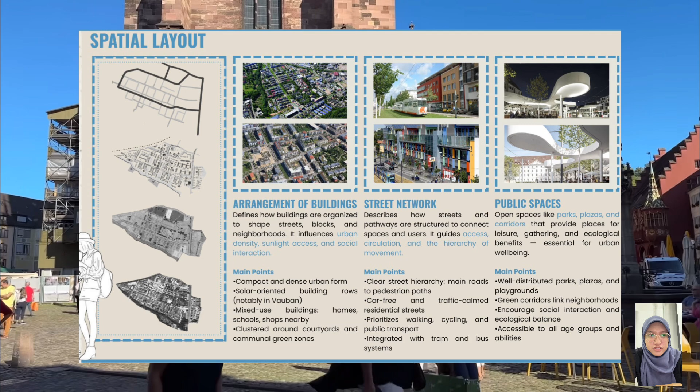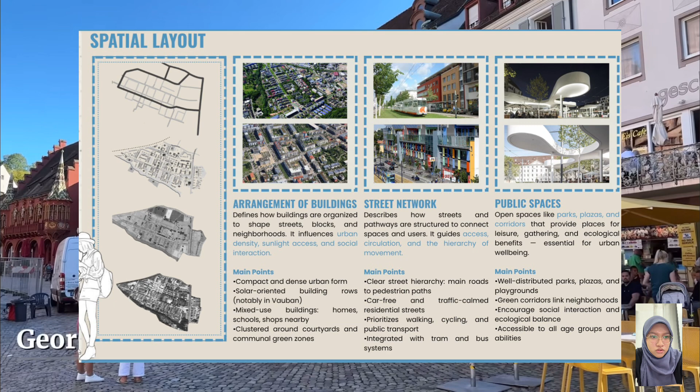Now let's talk about spatial layout for Freiburg, Germany. First is arrangement of buildings. This defines how buildings are organized to shape streets, blocks, and neighborhoods. It influences urban density, sunlight access, and social interaction. The main points are compact and dense urban form, solar-oriented building rows, notably in Vauban, mixed-use buildings with homes, schools, shops nearby, and clustered around courtyards and communal green zones.

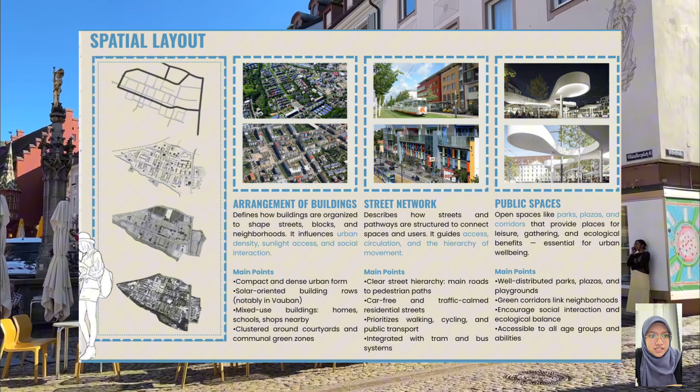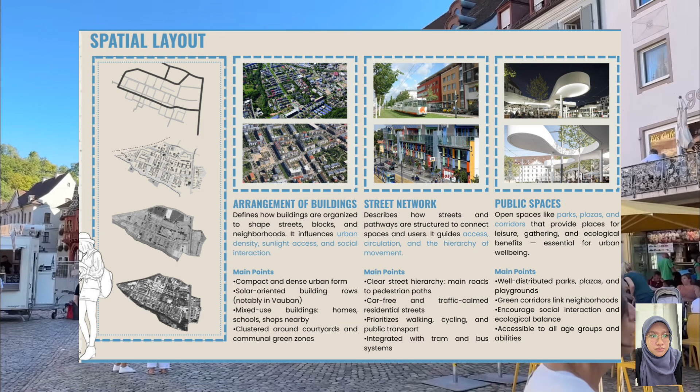Second is street network. It describes how streets and pathways are structured to connect space and users. It guides access, circulation, and hierarchy of movement. The main points are clear street hierarchy from main roads to pedestrian paths, car-free and traffic-calm residential streets, prioritizing walking, cycling, and public transport, integrated with tram and bus systems.

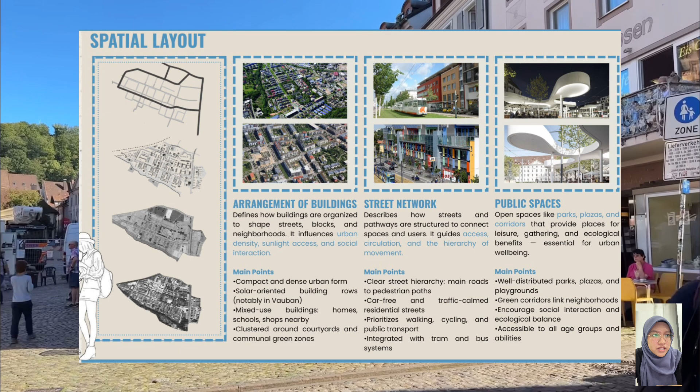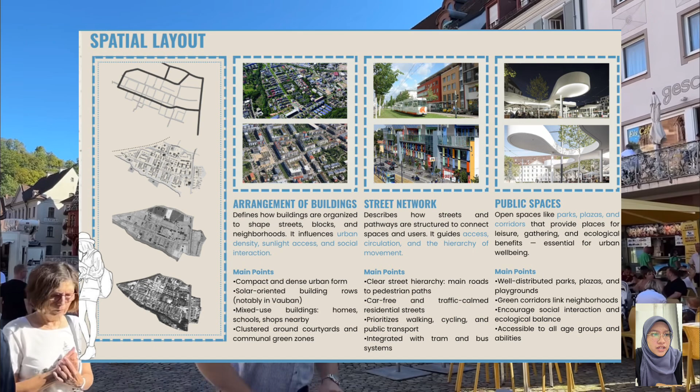Third is public space. Open space like parks, plazas, and corridors provide places for leisure, gathering, and ecological benefits, essential for urban well-being. The main points are well-distributed parks, plazas, and playgrounds. Green corridors link neighborhoods, encourage social interaction and ecological balance, and are accessible to all age groups and abilities.

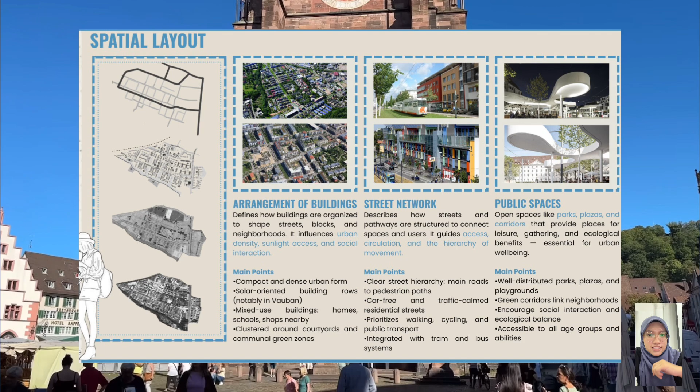Impact on urban design. First, it transforms daily movement. Street design for walking and cycling turns everyday commutes into safe, healthy, and joyful journeys. Cars become optional, not essential.

Second, it creates vibrant social neighborhoods. The close-knit arrangement of buildings and shared green courtyards sparks constant interaction. It doesn't just house people, it connects them.

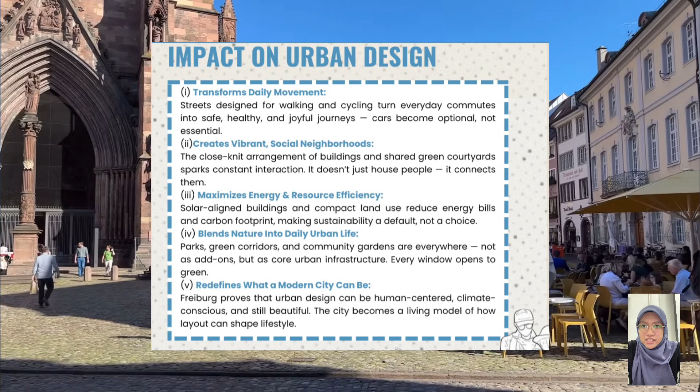Third, it maximizes energy and resource efficiency. Solar-aligned buildings and compact land use reduce energy bills and carbon footprint, making sustainability a default, not a choice.

Fourth, it blends nature into daily urban life. Parks, green corridors, and community gardens are everywhere, not as add-ons, but as core urban infrastructure. Every window opens to green.

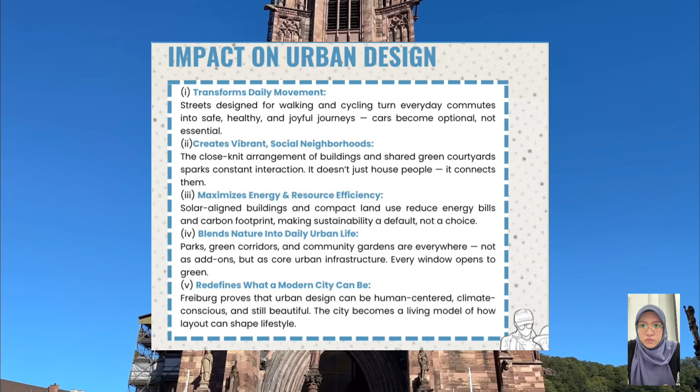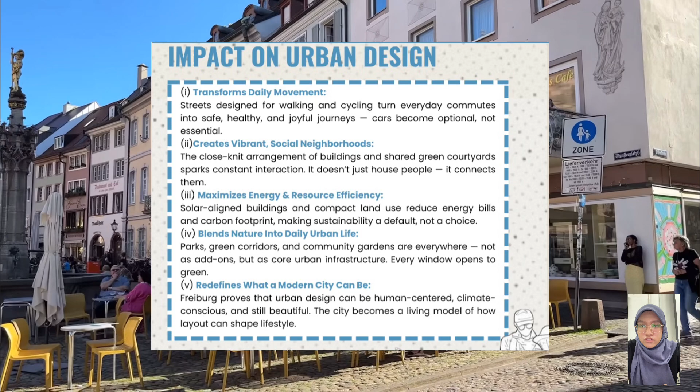The last one is it redefines what a modern city can be. Freiburg proved that urban design can be human-centered, climate-conscious, and still beautiful. The city becomes a living model of how layout can shape lifestyle.

Socio-economic factor: first is income level at Vauban district. Vauban is a wealthier neighborhood in Freiburg. Higher income here means more stylish houses, well-equipped parks, and bike-friendly streets. Residents can afford eco-friendly buildings and energy-efficient technology.

The next factor is education level at University of Freiburg. The University of Freiburg attracts highly educated people like professors, researchers, and students. This brings new businesses, cafes, bookshops, and innovation centers close to the university.

The last factor is employment opportunities at Innovation Park Freiburg. Innovation Park is a hub for high-tech companies and healthcare providers. It offers many jobs for graduates and skilled workers, boosting the city's income and growth.

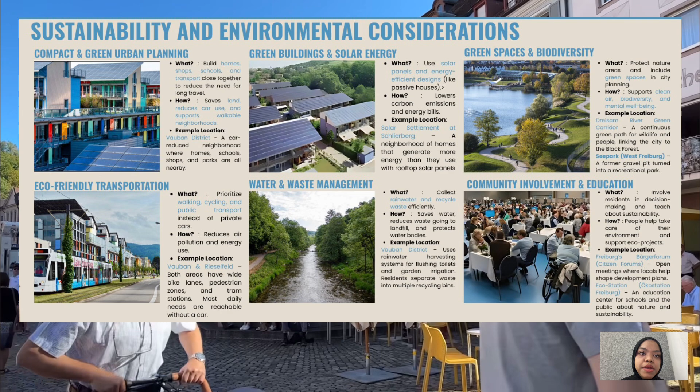What did they do? They built homes, shops, schools and transport close together to reduce the need for long travels. How is it sustainable? It saves land, reduces car use and supports walkable neighborhoods. The example location is Vauban District, a car-reduced neighborhood where homes, schools, shops and parks are all nearby.

The second one is green buildings and solar energy. What did they do? They use solar panels and energy efficient designs like passive houses. How can it be sustainable? It lowers carbon emissions and energy bills. The example location is Solar Settlement at Schlierberg, a neighborhood of homes that generate more energy than they use with rooftop solar panels.

The third one is green spaces and biodiversity. What did they do? They protect nature areas and include green spaces in city planning. How can it be sustainable? It supports clean air, biodiversity and mental well-being. The example location is Dreisam River Green Corridor, a continuous green path for wildlife and people linking the city to the Black Forest. The second example is Seepark at West Freiburg, a former gravel pit turned into a recreational park.

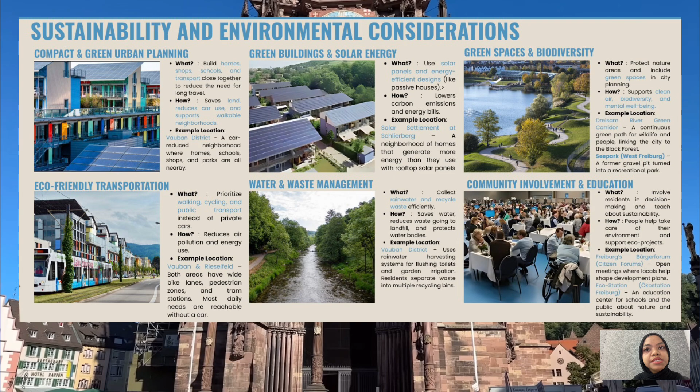The last one is community involvement and education. What did they do? They involve residents in decision making and teach about sustainability. How can it be sustainable? People help take care of their environment and support eco projects. The example location is Freiburg's Bürgerforum, also known as citizen forums, open meetings where locals help shape development plans. The second example is Eco Station Freiburg, an education center for schools and the public about nature and sustainability.